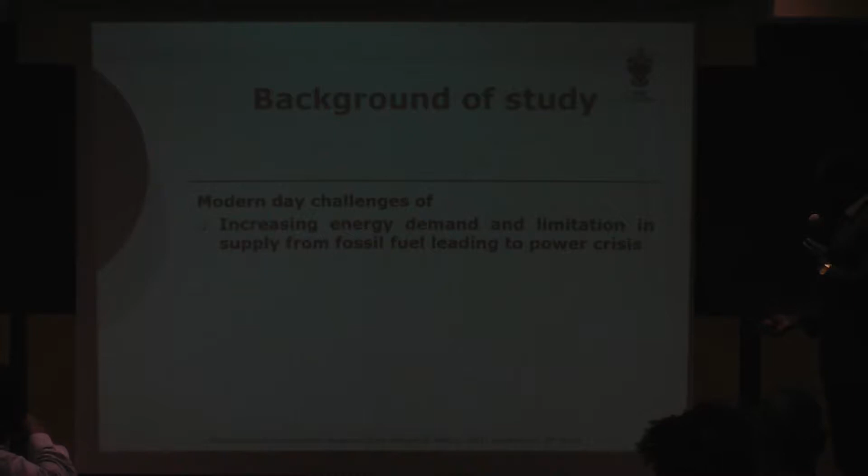And the used tire presently is causing lots of problems in the environment because it is gradually increasing due to more sectors embracing it in different forms of transportation. This is the common case we have here, even in railways, heavy-duty vehicles, aviation, recreational activities, and different sectors that have to do with transportation. So this has led to the generation of a large volume of waste tires.

So presently all over the world, the current report on waste tires worldwide is about 1 billion tons per year, with South Africa having about 142 million tons presently, based on a 2008 report, and there is an increase of that with 9 million tons annually.

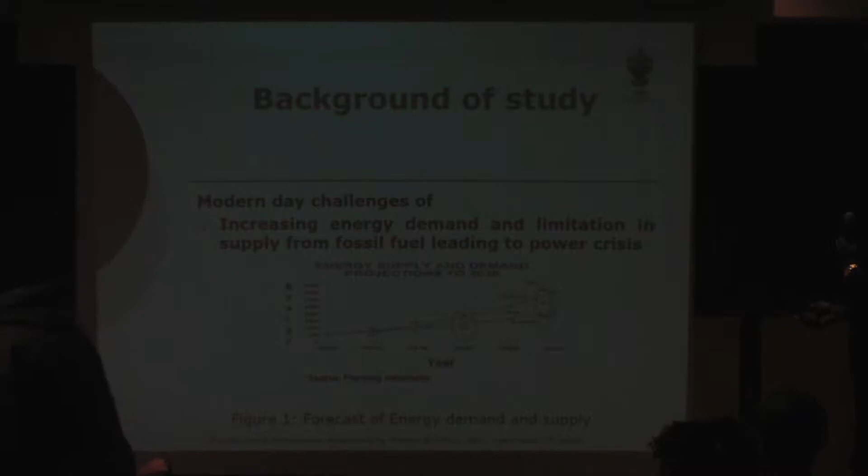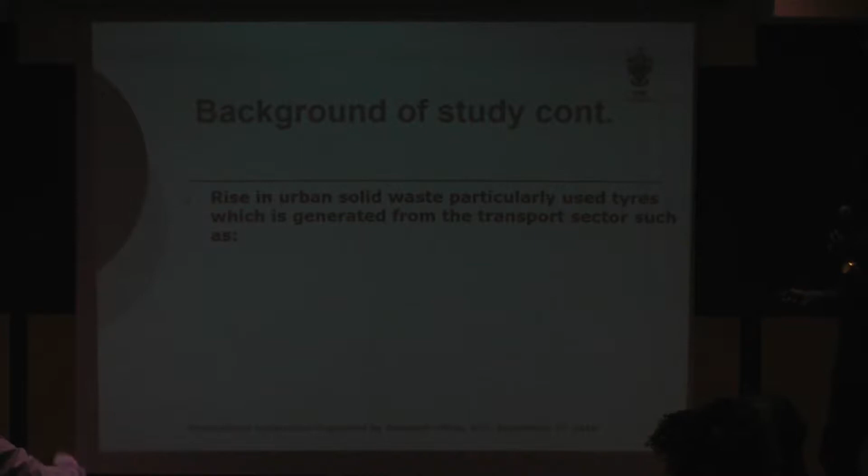So if this waste product is not properly managed, there will certainly be consequences, and one of them is that it can take up our available land space, and we are aware that presently in South Africa the issue of land is becoming a major point of discussion in society. In fact, some are using it as a campaign slogan. So we don't have land, and now tires want to occupy the lands. That will be an issue, and it could lead to a breeding ground for disease vectors.

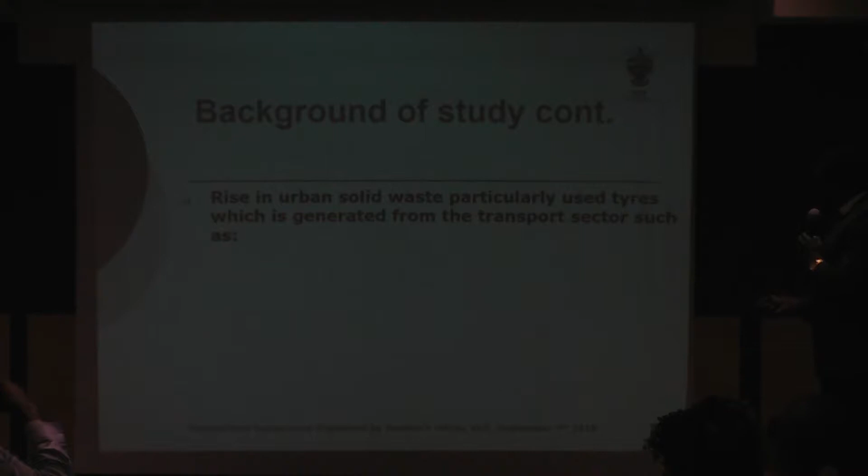Another potential hazard of improper disposal of this material is that in case there's a fire outbreak, it's going to be very disastrous. Once it starts burning, it keeps burning. So our research motivation is based on the continuous demand for energy, which leads to the exploration of alternative sources of energy, then the non-biodegradability of the material.

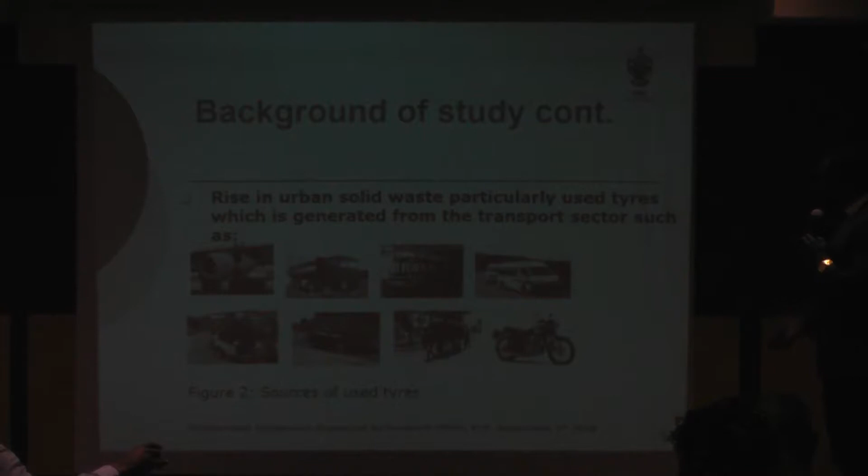It's very recalcitrant. If you bury a used tire and leave it for the next 100 years, there might be no significant degradation. And the major challenge is that it retains its volume, it retains its shape, so it's a big issue. So the objective of this study was to investigate the use of pyrolysis to generate pyrolytic oil from used tires, and at the end we carry out characterization, and then we compare the properties of the derived pyrolytic oil with that of petroleum fuels.

So what is pyrolysis? Pyrolysis is the combustion of a material in an atmosphere where there's an absence of oxygen. So we're going to make use of the CVD, chemical vapor deposition reactor, and then we optimize the process because pyrolysis gives you room for that. This is one major advantage that pyrolysis gives you over other methods of combustion, like gasification and incineration.

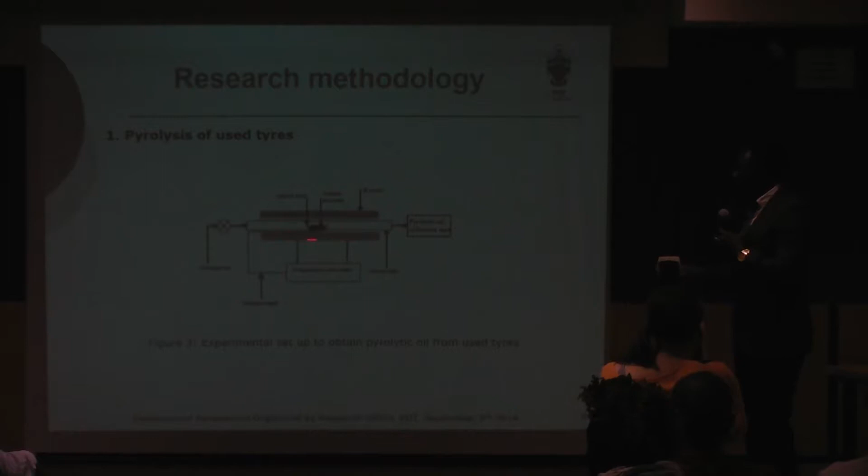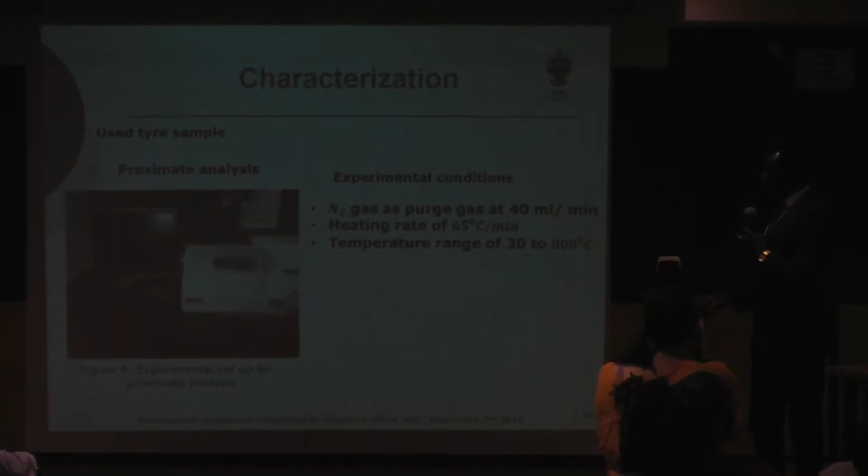So when the oil was derived, we carried out characterization using NMR. We also did characterization using FTIR, and we also did characterization using GC-MS.

So coming to the results and discussion from what we've gotten already, we found that with our proximate analysis, the volatile content, which is what we are interested in in the material, was more than 50%. And when you compare it with other tires that were used in literature by other authors, it's very significant. If you want to conduct pyrolysis on such a material, you must look out for this so that it can give you an idea of the amount of liquid you're going to have at the end of the day.

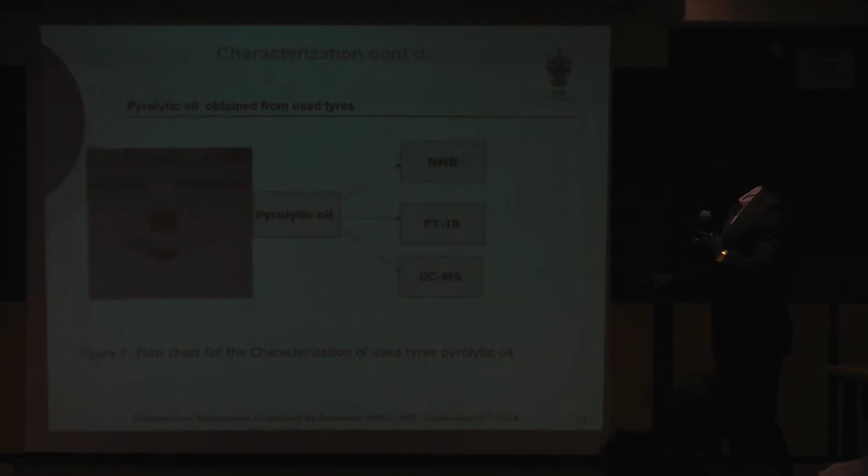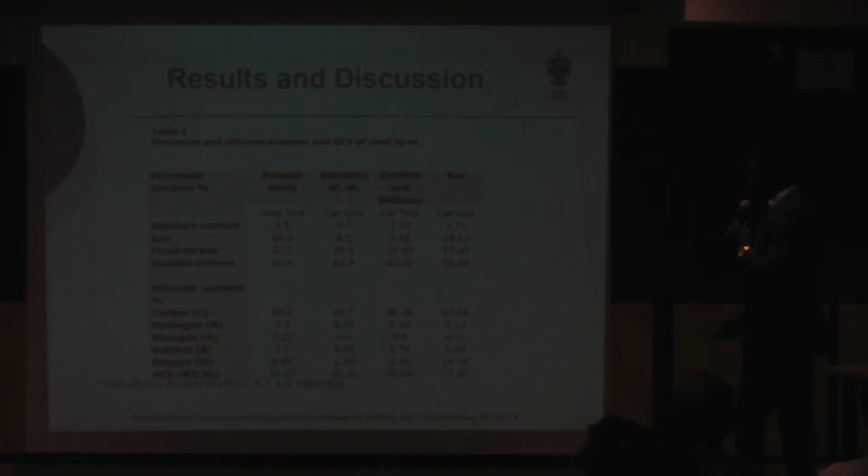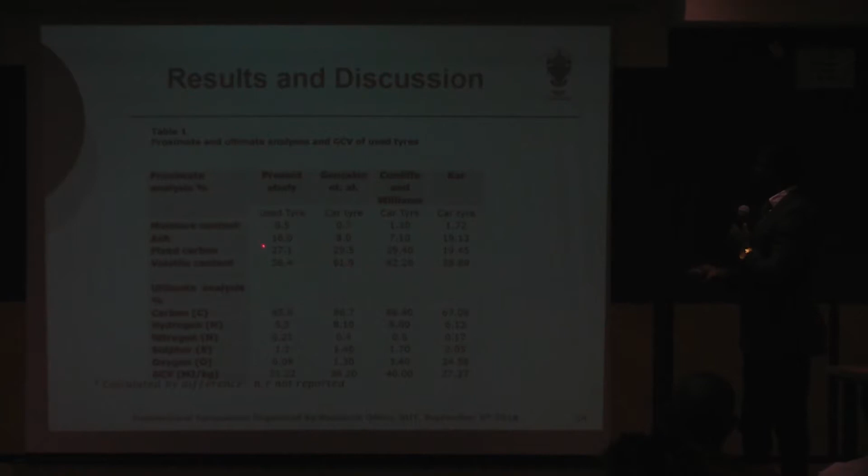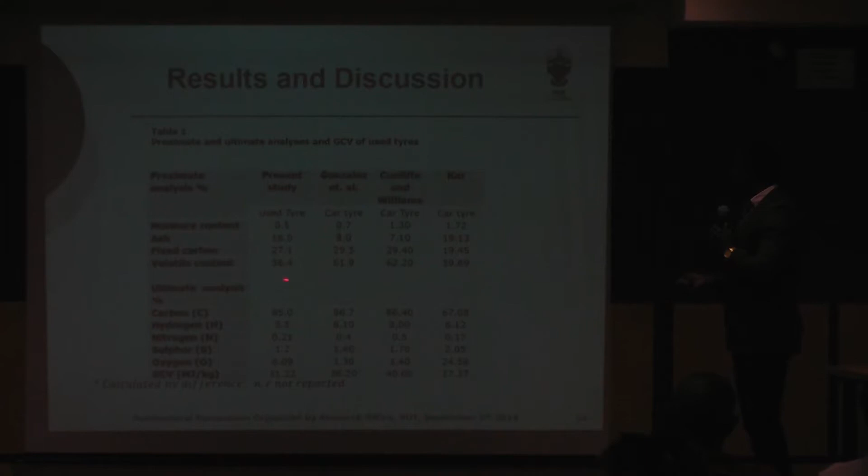So the volatile content was okay, it was within specification. And then for the elemental analysis, we also looked out for the carbon. It was 85%. So that's an indication that we're going to have some volume of ash that is going to come along with it. And then the sulfur content, 1.2, which is not too high, but within the specific range that is allowed for any liquid fuel. Then the energy, the heat content, 31.22 for this same tire, which was also encouraging.

So for the TGA, this is the TGA and this is the DTG. It had two peaks. Sorry. Okay, we have two zones here. This first phase is the release of moisture, and then the chemical or water content or bond that is within the material. And then from here to this point, about 230 to about 520, is where you have the active zone for the degradation.

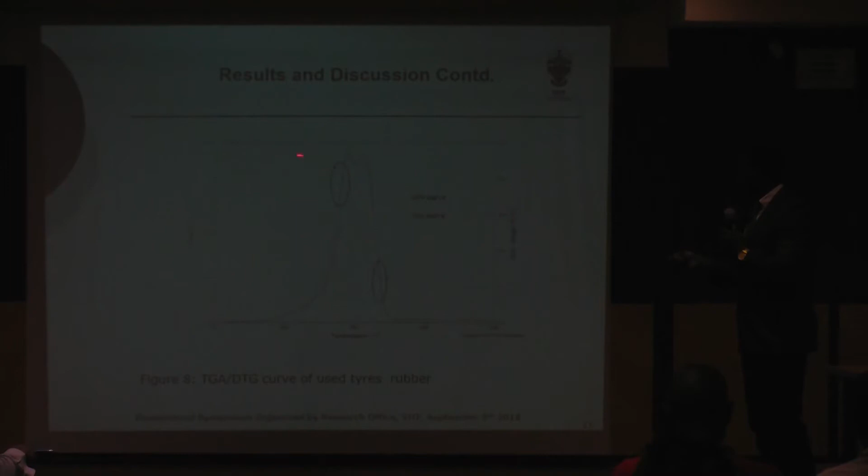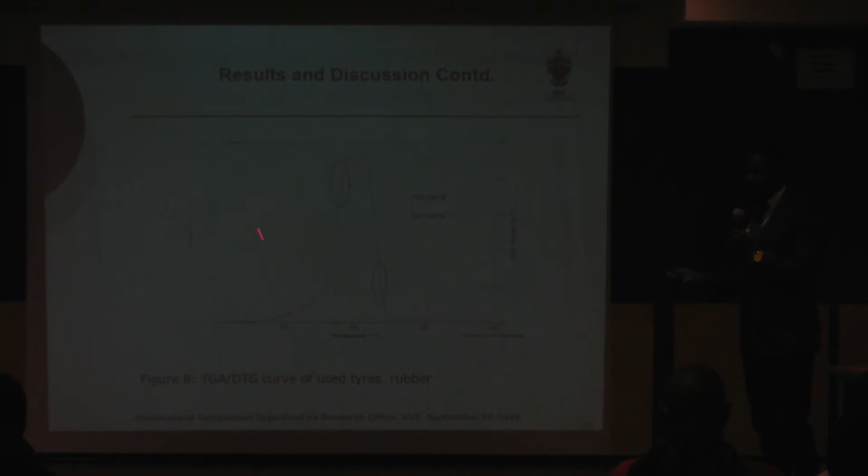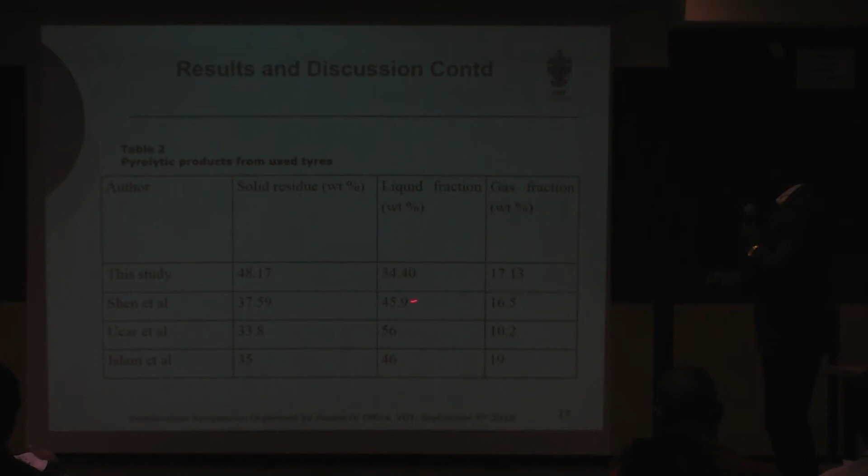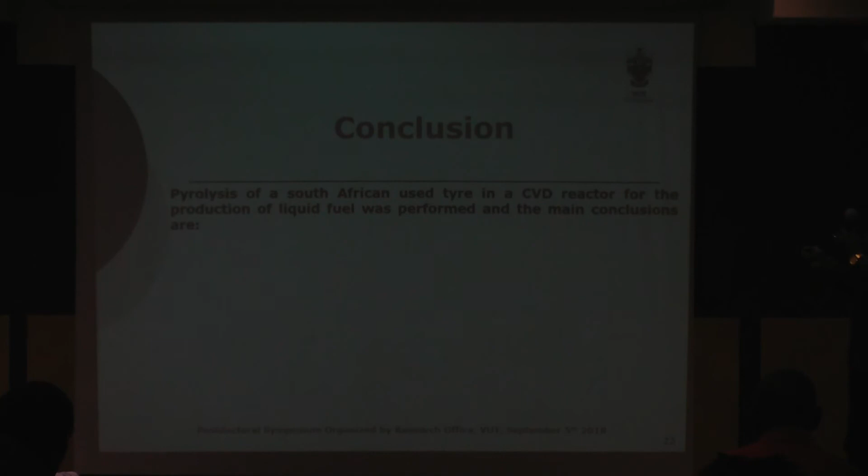So in conclusion, we found out that the proximate and ultimate analysis results of the material showed its suitability as a feedstock for the process. Of the 3 basic products we obtained, the mass of the liquid was 34%, which is within the range of 30 to 56% reported in literature. And the amount of the gas fraction is sufficient to be a source of energy for the process when it is recycled.

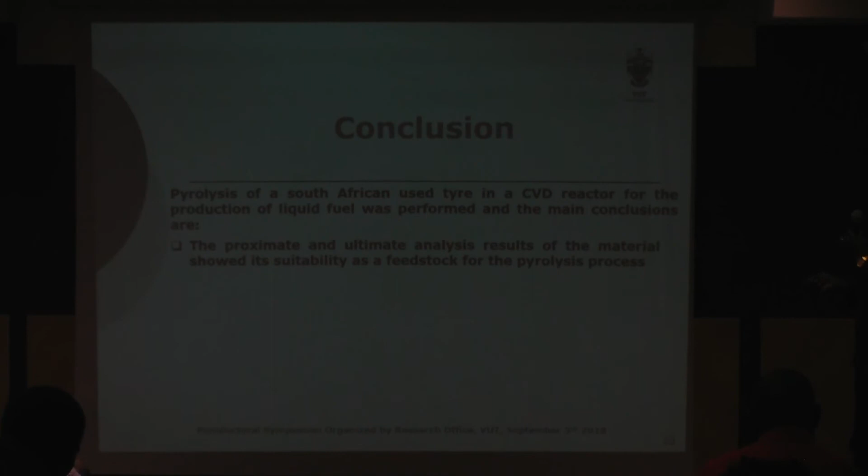We also discovered that the GCMS result classified the pyrolytic oil as mainly made up of aliphatic and aromatic hydrocarbons with the presence of other useful compounds such as limonene. And the fuel properties were commensurate with those of commercial diesel, so there is a possibility for it to be used for combustion in a diesel engine.

So future work will carry out fractional distillation of the liquid to obtain distillates. We will investigate the fuel consumption and performance of the distillates when blended with varied amounts of commercial diesel in a diesel generator. That's the sole purpose, so that we can take our tire from waste to fuel for our generator.